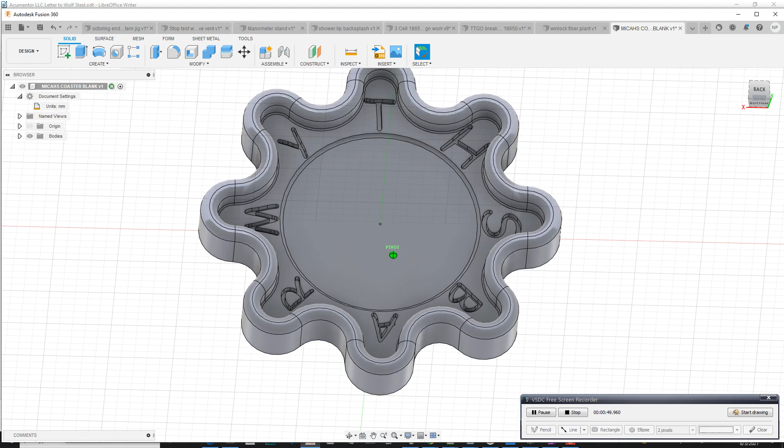And this is a complex little model, and we'll go over why it's complex here. The other thing is that this is going to be made out of maple, and I have it set up with the bits that I would use. I'm going to go in and get the bits that my friend's system might use. And so let's go over to the manufacturing tab.

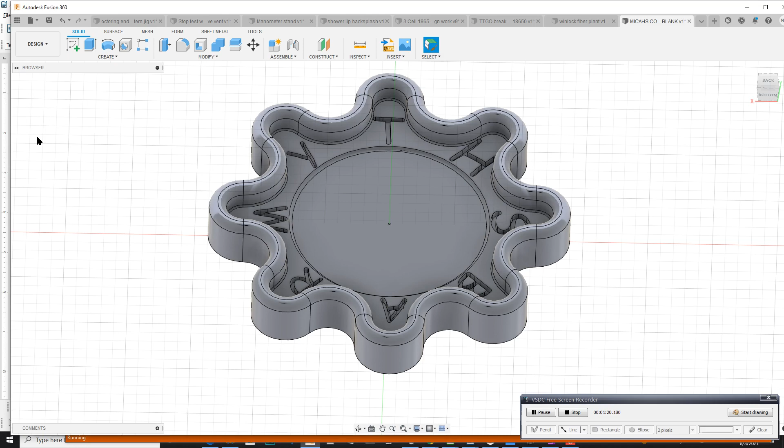All right. So I've got my work setup file. Here's my work setup file. I got my Z going straight up. X and Y, it doesn't really matter once Z is straight up, but Z is the direction that the bit will come down in. And so once you got that set up, that's really good. All right, so

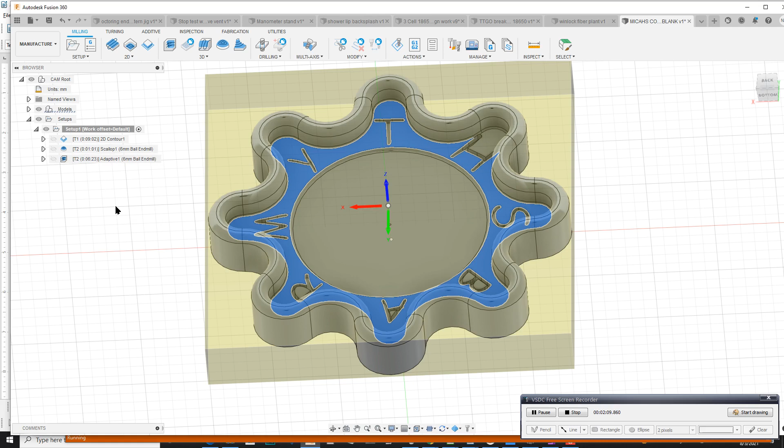the next thing I want to do is an adaptive. So let me go in. Let's see. What did I do wrong? Oh, the setup file's over here. So I'm going to say OK. Now I'm going to go in and do an adaptive. I'm going to edit this toolpath. My friend has 3mm end mills, so I'm going to go in and try to get a tool.

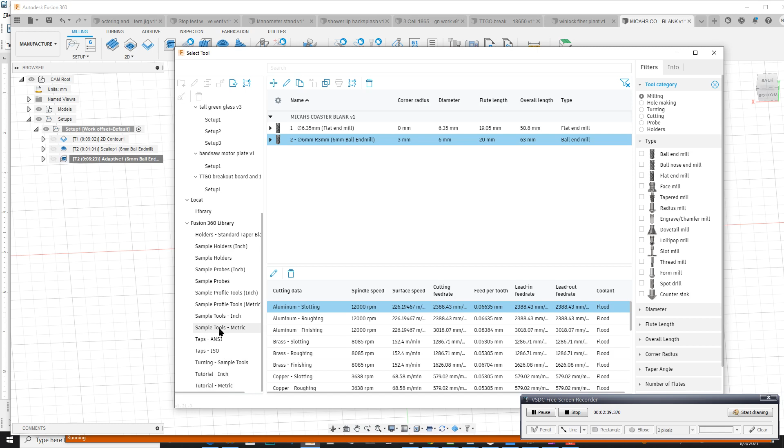And to get a tool, I have to go into the sample tools, metric, and I'm going to go with a 3mm flat end mill. Now this may not be what he has, but it's a place to start. Alright, so I've got the 3mm end mill in here.

12,000 is a reasonable speed. I don't think we can go this fast. I think we're going to have to drop to around 800. And our ramp rate, I want to start out with 250 and 250. Alright, so that is our tool setup.

Turn this off. Then we go to adaptive. We're just going to be cutting this pocket out, and it'll incorporate this detail. It will not get the text. Alright, so the heights and everything, I'm going to go here. I'm going to take this off. I'm going to go, let's see. I don't use adaptive very often.

Maximum axial engagement. I'm trying to make it so it doesn't go too deep. Well, let's take a look at what it does. So, optimum tool load, it doesn't really like it. Okay, optimum tool load. Let's go with 1mm, 1.5. Let's just go with 1mm. Let's see what it does. Alright, we're able to get by with that. It's calculating right here. We're at about 9%.

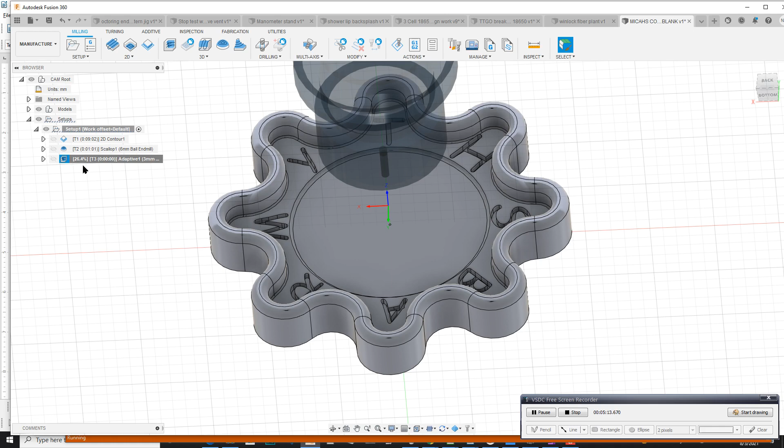Man, that's going to take a long time. What I'm concerned about is that, oh dear. That's not the prettiest thing. It looks like it would work. It's going to take forever. And let's see if I go get my... This is my task manager, and even though I have a lot of documents open, I'm at 100% utilization because these toolpaths just take forever to calculate, especially when you're using a small tool. All right, I am going to stop until this is done.

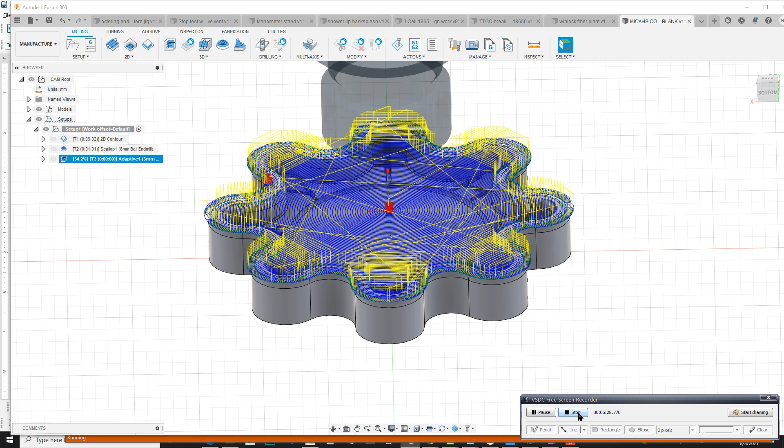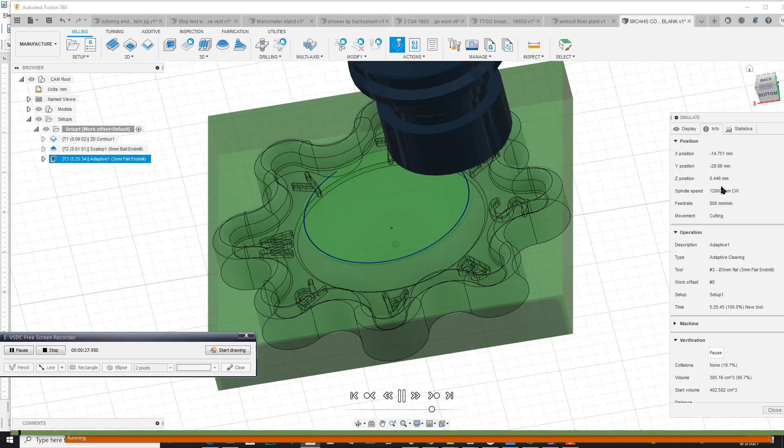Well, look at that. The toolpath is done. It's going to take 5 hours and 25 minutes, which is not that good. You can come here and do a simulation, and we'll speed that through. And you can look right here. It's only going down 0.5 millimeter. So you can tune in some of the settings to get a better

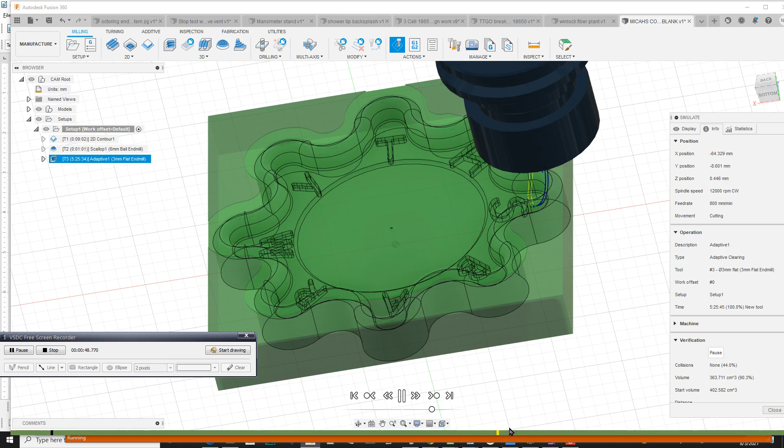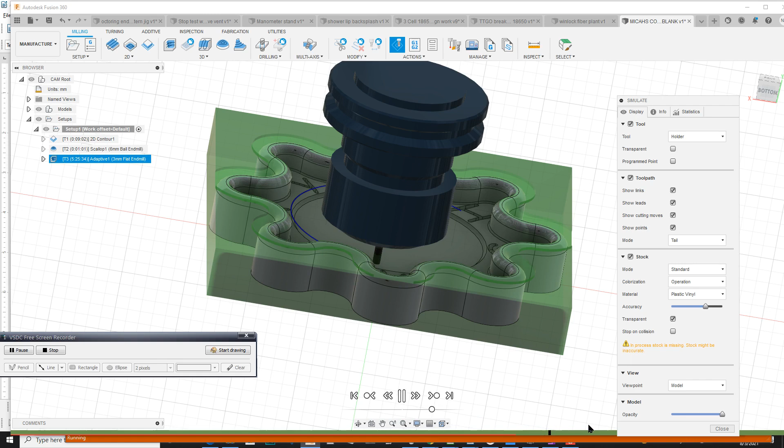well, let's go out here. Let's see how deep it's going. This is not too bad. Let's see here. I can adjust some of the display things. Opacity. All right, so it seems to have stopped. But it's working on everything but the text.

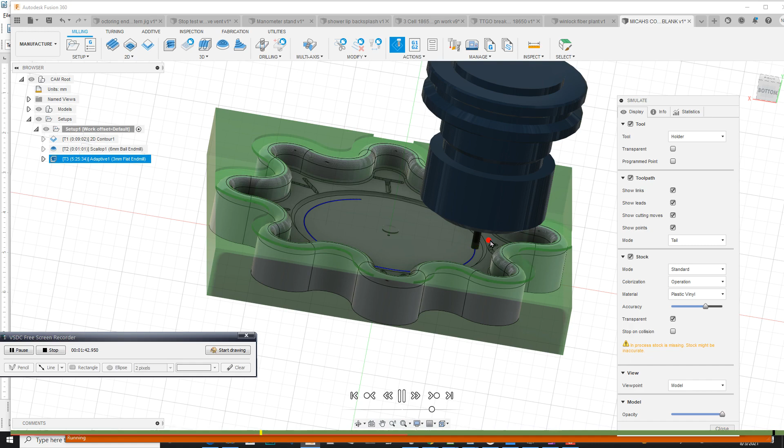So it should get this lower profile and this upper level here. So that one is done. I'll close that one, and that is going to be the first one that is done. So I'm going to slide it to the top.

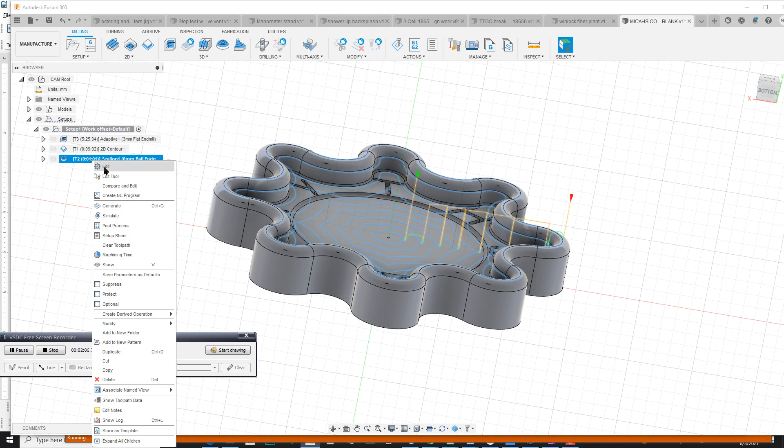Then we're going to get a ball mill out. So I'm going to take this one, I'm going to edit it, I'm going to go get a new tool. And we're going to go to Sample Tools Metric. We're going to go to a 3 millimeter ball.

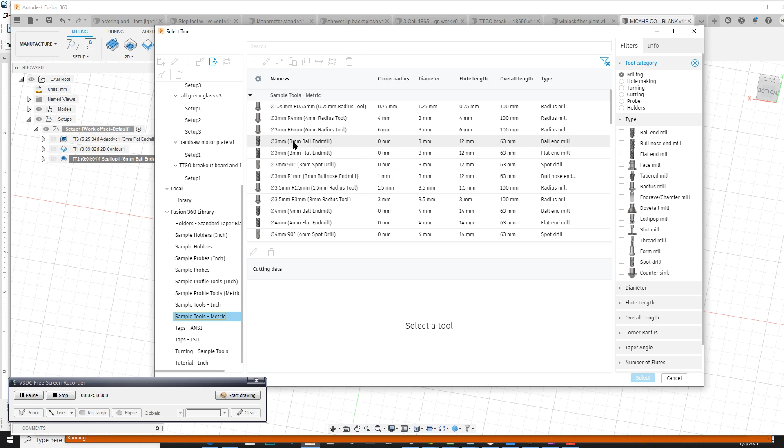There we go. We're going to leave the settings the same. Right now I have it set up as a, let's try a silhouette. Let's see how it does. What I'm trying to get is this crown.

There's 2 fillets on here, and I'm trying to get those. So let's see what it does.

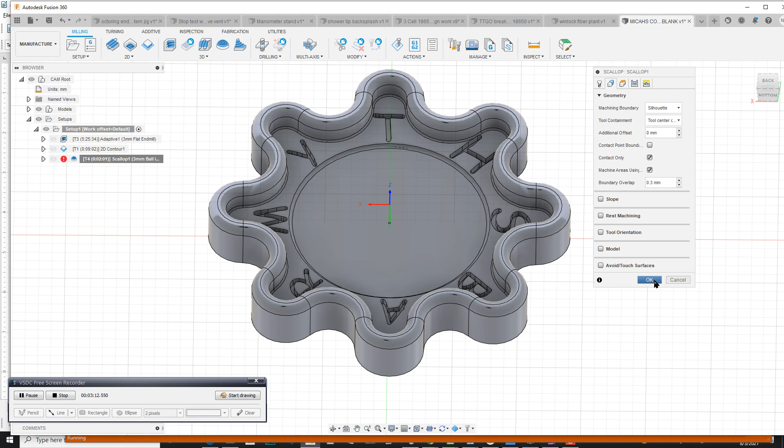All right, so it's calculating it. It's got 2 minutes. Now it tries to do this area as well, and it tries to do this area as well, but it does get this in here. So that's reasonable, but it's only 2 minutes, so it's taking a pretty aggressive cut.

So let's go see if we can step over of 1 millimeter. That's going to take longer, but with a ball end mill, you really don't want to take off too much. All right, we're at 13 minutes, a little finer cut. I like it.

We'll move that one up. That one's ready to go. All right, so now you've got everything but the text. You want to cut the part out. So this is a contour.

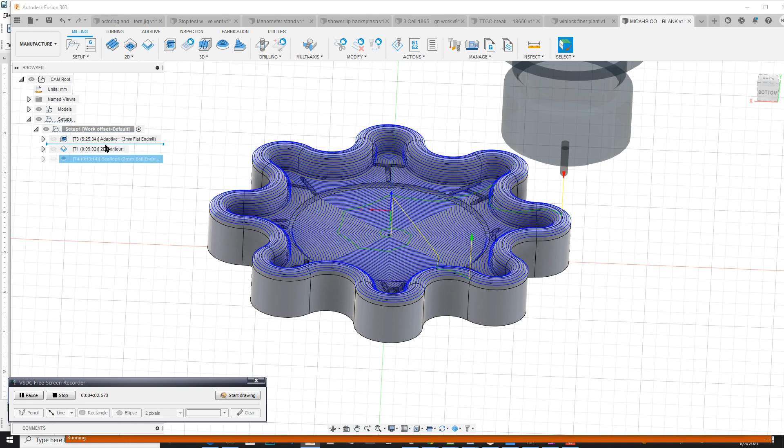And I'm going to change it to a 3 millimeter bit here. I'm going to use the bit we were using before, and it better be a long bit. We don't want to flood. We're going to keep all these settings the same.

I think it's already... Now what I'm going to do here is come in here and set multiple depths. We want to take multiple depths, so we're going to go down 1 millimeter at a time. With a 3 millimeter ball mill, or 3 millimeter end mill, you can go down about up to 3 millimeters, but let's just say 1.5.

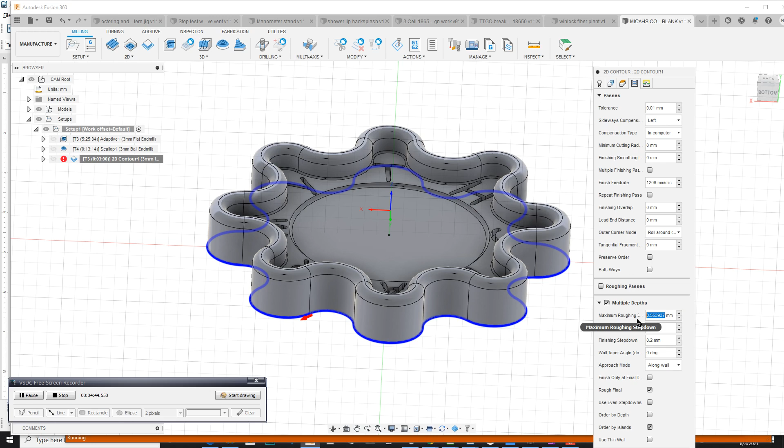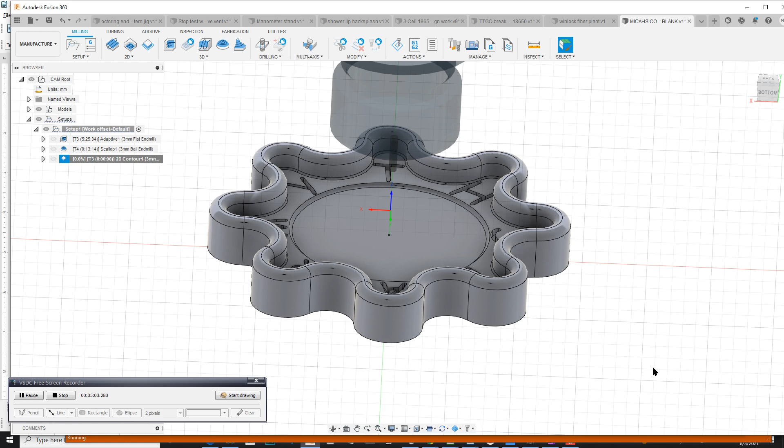And make that smaller, say OK. And there's your tool path for the perimeter. Now you can put tabs in here, but I want to keep this video short. So we'll start at the top and we'll say this is the simulation, and we'll make it maximum speed. There we go.

You're going to have to stop and change the bit from an end mill to a ball nose at some point. And then you have a 13-minute operation, and then you have a 7-minute operation to cut the part out. And between bit changes, you have to re-zero the bit.

All right, so now we're changing bits and we're going to a ball nose and we're off to the races again. Let's see if I can make it.

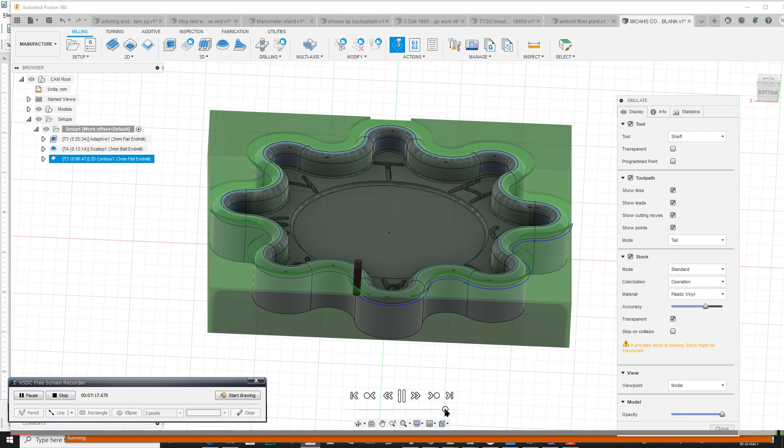So let's go. We're at the point where we're cutting it out here. And the computer's not updating as fast, but all right, well, you can preview it and get a good idea how things are going to look.

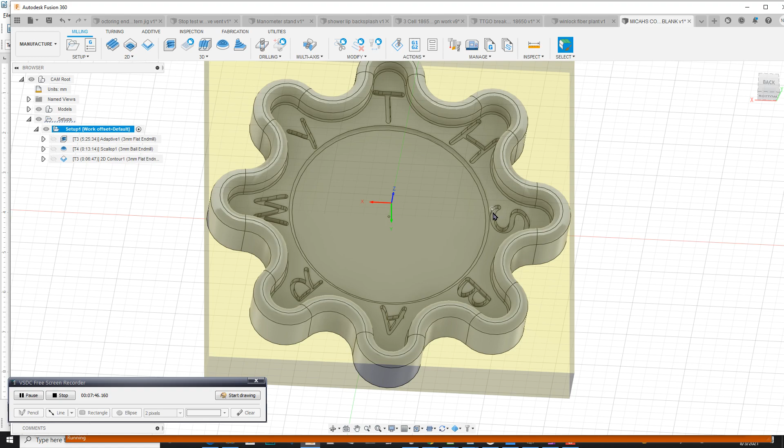Now let's talk about these. Texts are deep down in here, so you need a long bit. You also need a very narrow bit. I would suggest you do this with a chamfer bit and do an engraving, but that's a completely different story to begin with. A 3 millimeter bit is not going to get down in here. This dimension is 1.5 millimeters, so you're going to need less than a millimeter bit to get in there.